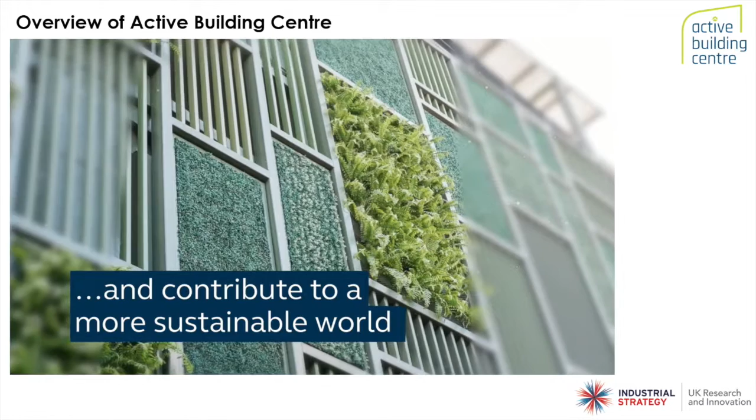So hopefully that gives you a slight introduction as to what active buildings are and how they form part of an agenda where we're trying to make the urban environment we live within more sustainable in the longer term. At the moment we potentially have buildings which are nodes on the network that are consumers of energy rather than production devices on the end of the energy network.

So our mission statement as Active Building Centre is to create an independent national centre to convene industry, academia and government, because actually what we want to do is support people like yourselves to deploy active buildings, adopt technologies, and deploy them with our support as a central convening point.

And where did this start? Well, our vision has always been trying to transform and bridge between the construction sector and the energy sector by deploying active buildings. What do we mean by that? Well, we're trying to get buildings that are powered by the sun rather than other burning fuels. And we need to contribute to vehicle electrification, and we also need to start developing methods by which we can help decarbonise the built environment rather than be an energy drain on the built environment.

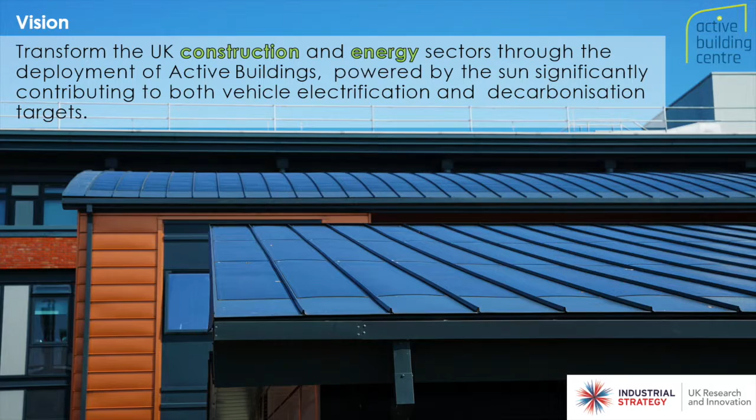And actually when you delve into what those inspirations are, well, I think we've had the glut of coal and gas for quite a significant time. And we may have people that say it's clean coal, but I don't fully believe that we've still reached the point where we've got truly clean coal. I don't think we ever will. So we've got to try things in a slightly different way.

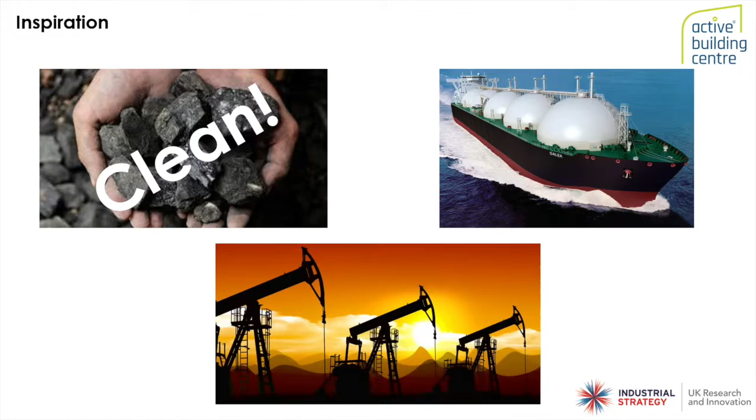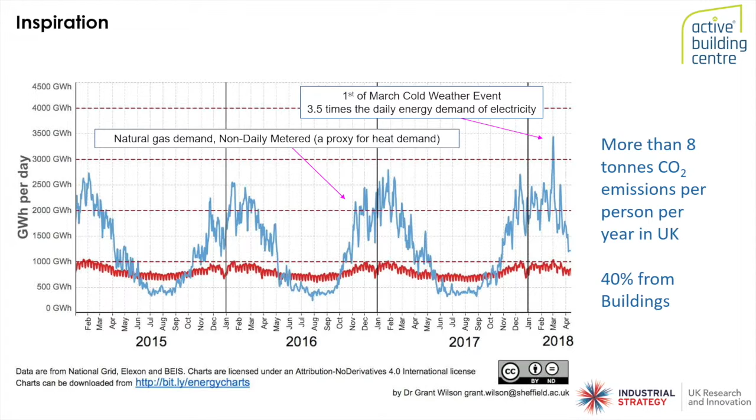And if we propagate to a position where we have to electrify transport and we have to electrify heat, what we are trying to do as a nation is get the blue line into the red line. And what that essentially means is we have to specify an infrastructure that's highly redundant within its own capacity. And that's a local incentive for us and inspiration for us in this country.

One of my colleagues was recently in India, and the problem there is probably a bit more acute because the air quality measures in places like Delhi and Mumbai, for instance, are 5 times higher than you would get the emissions from a conventional blast furnace in a steelworks. So you can stick your head into the flue gas of a steelworks and still have better air quality than you do in certain parts of the world. And that has obviously a health impact, a quality of life impact that we need to start addressing.

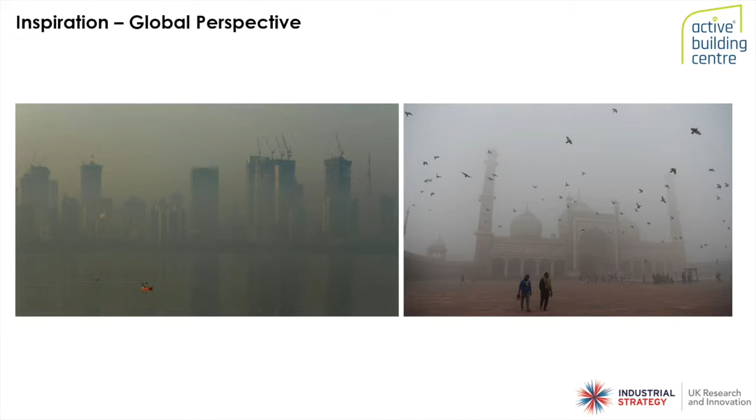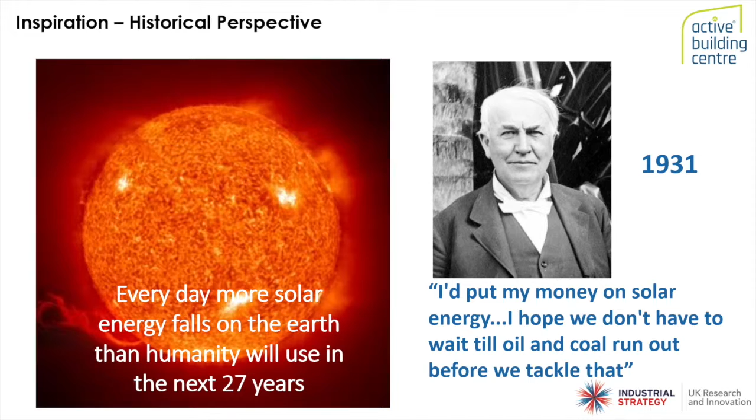Moving a bit further back, we have a wonderful nuclear reactor that shines down upon us and gives us 27 years worth of energy every day that we can use. And actually, a brilliant quote from 1931: put your money not in coal or oil. And I think we're at a point where essentially we've reached peak oil and gas, and we need to transition, and we need to transition more aggressively, and buildings are a functional part of that transition.

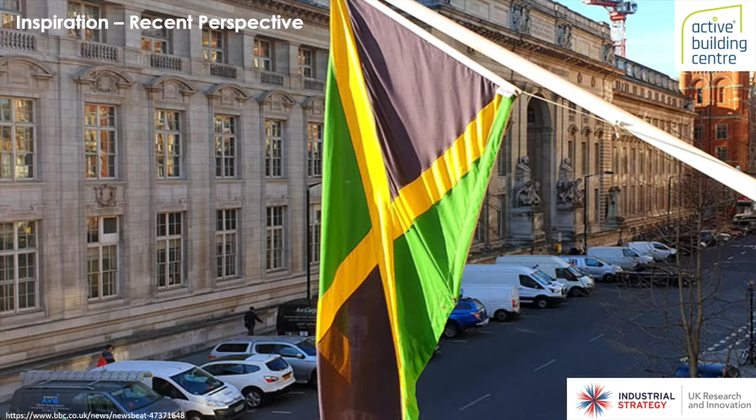This was a really interesting thing that happened in our balmy February that we've had this year. So this is a picture, I believe, on the 19th of February this year. Last year, this was the same picture, courtesy of the BBC. So I'm not saying this is climate change in action. I think that would be too brave in front of an audience. But we certainly are seeing changes, and we need to respond to those as humanity. We're not quite doing that yet.

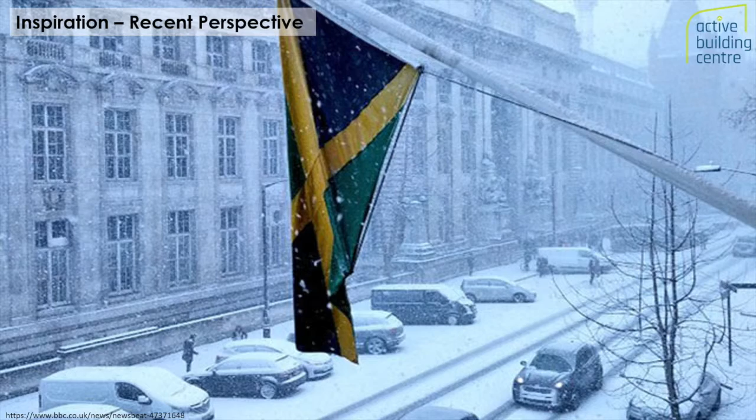So that's the inspiration we've got, and the Active Building Centre itself is trying to create a nucleated access point for partners to come in and help us address the challenges we've got. And broadly speaking, we can segment that into 5 different strands. So number 1 is, as a demonstrator pipeline, the Active Building Centre is responsible for delivering a range of demonstrator buildings that showcase technology, showcase how we can adopt these new technologies and integrate them into our energy infrastructure.

We obviously need to have connectivity between these buildings, because just a demonstrator building on its own is probably not going to change the world. We need thousands of buildings at this scale, and that takes a critical mass, and it takes effort, and it needs a community to deliver those with us.

And then we have the opportunity at stage 3 to start thinking about how do we bring these communities, or these buildings, together to start acting as one entity that interacts with the energy infrastructure, so that we can support the energy networks, rather than just be a drain on the end of the conductor.

And obviously aggregating at stage 4 at national scale, if you have 1,000 batteries controlled at a single point, it means technically you can make the grid go kaboom. That's not what we want to do, but we do want to understand the mechanisms by which we can interact and support the infrastructure we have in a more confined and structured manner.

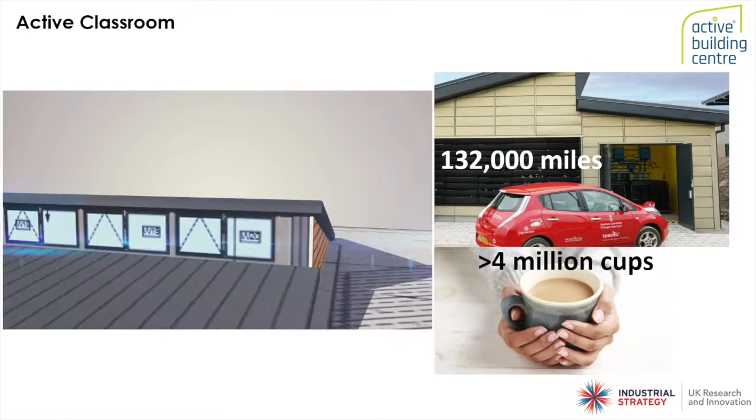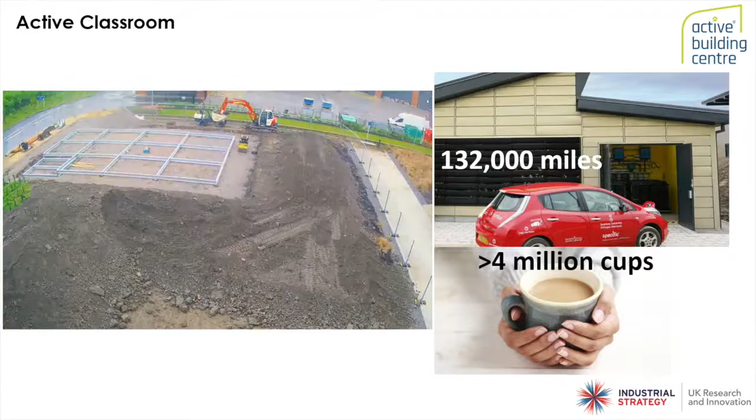So that's the backdrop. The Active Classroom is a perfect example of this. This is one of our initial demonstrators at Swansea University on the campus. A modular building, very lightweight in its construction methodology, with a screw pile system, very fast to actually construct. So the framing system goes together quite quickly, and it's a panelized system.

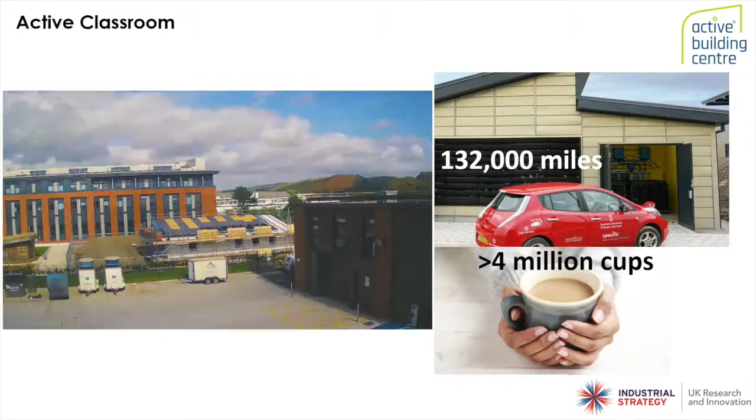What you'll see at the moment is a time lapse through the construction process. In a moment, you'll see the roof plate being substituted with photovoltaics, and that's almost a finished building. So consider that's a month build or weekly build program rather than a year program, that's how we need to accelerate adoption of these buildings. They need to adopt modern methods of construction, they need to be replicatable, and they need to be consistent in the way they perform.

So that's an example of one we've already done, and that's created 132,000 miles that we can travel in a Nissan Leaf. So I haven't done a road trip yet, but get in the car, I might not come back. And equally, between the break time of your favourite soap opera, we all have a cup of coffee. So it's the fundamentals of transport and being able to live in these buildings, and they occupy and work in a similar manner.

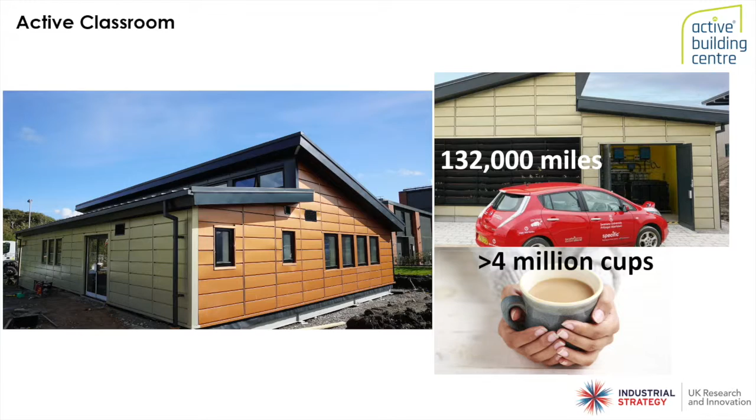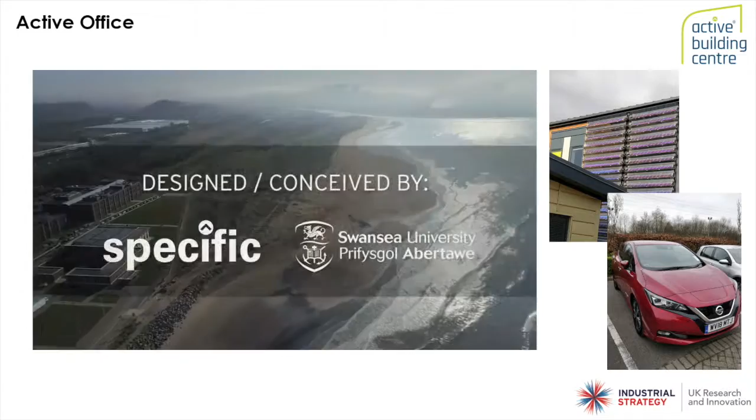The last video I want to show you is the second building that we did. This is with an organisation called Wernick. They potentially can deploy active buildings at a scale and manufacture them at a scale we've not really adopted in the past. So this is a new relationship, but a flagship building we've built, again on campus, feeding electricity into the campus electricity network.

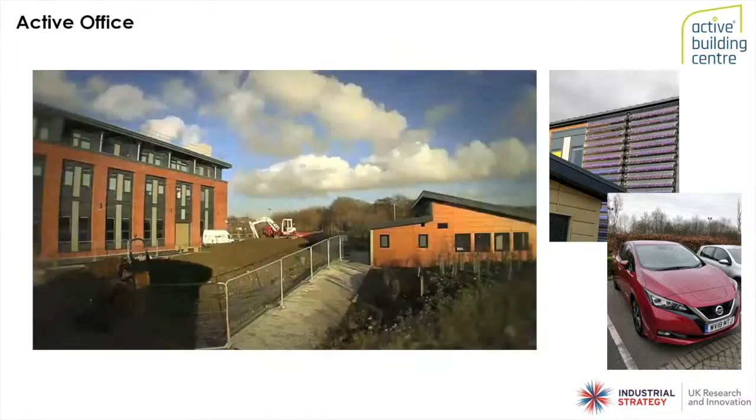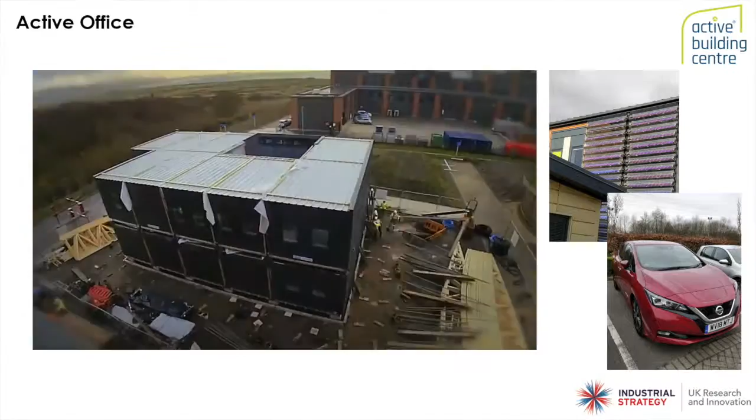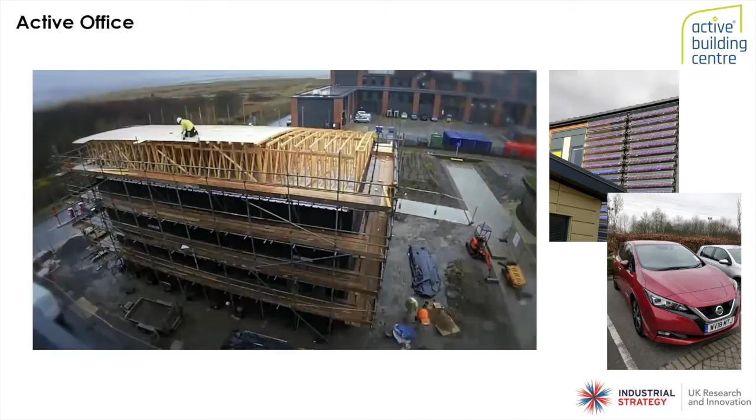And again, a time lapse of this building. So the construction method is slightly different, this is a volumetric system, a timber-based volumetric system. Foundations being a concrete pad foundation system rather than screw piles. So embracing as many different technologies as we can, including a curved arch roof system to track the sun and get more sunlight throughout the daily sun paths.

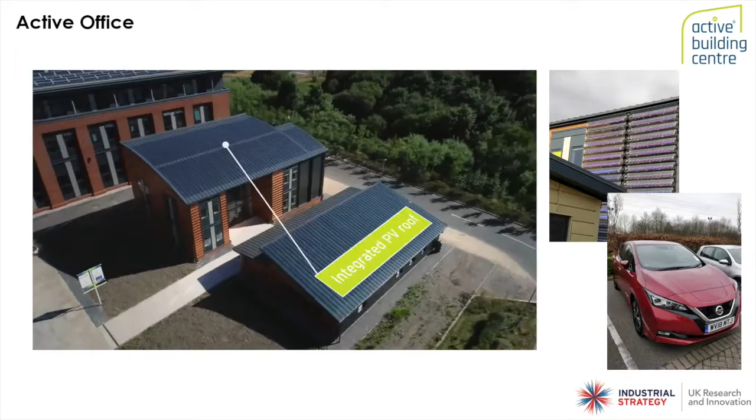And again, delivered at a pace that's unheard of. I believe that build process went from design, construction and building in 9 or so months. And we currently occupy that space as the Active Building Centre. We feed that electricity into the buildings, into vehicles that are on site, as well as back into the rest of the campus.

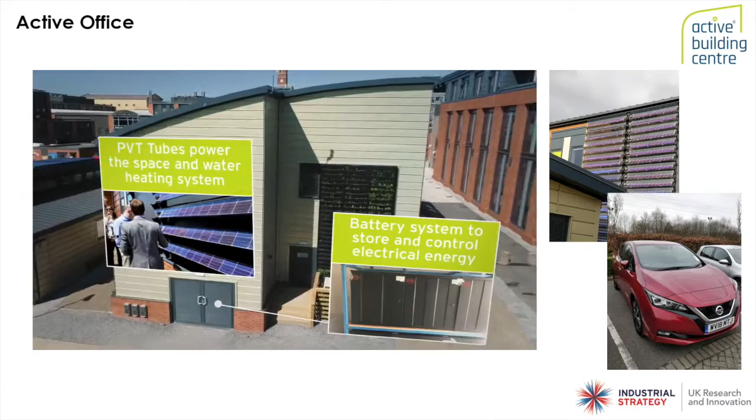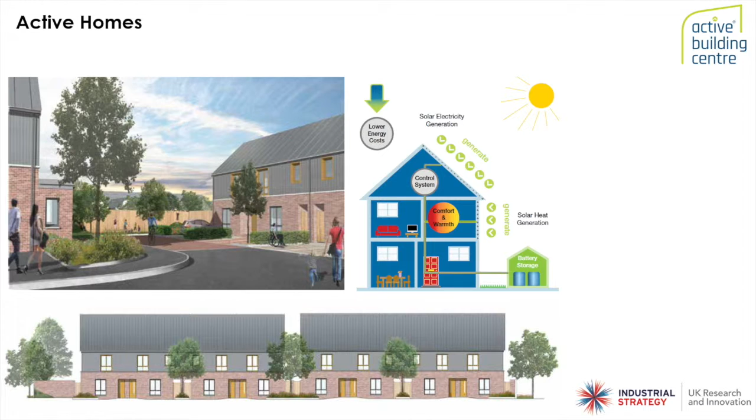The last slide I want to show you is, obviously, we're not just about education buildings, not just about little small classrooms, we are talking about homes, because that's where we also need to focus. So those homes are being adopted as active buildings. This contains a 16 site development that's currently in plan and being built, delivered by registered social landlords. So looking at affordability of housing, how do you integrate electricity generation systems into them, how do you control the storage of that energy, and how do you actually release that energy in a manner that's going to reduce your bills over time. So that's a quick introduction to Active Building Centre.